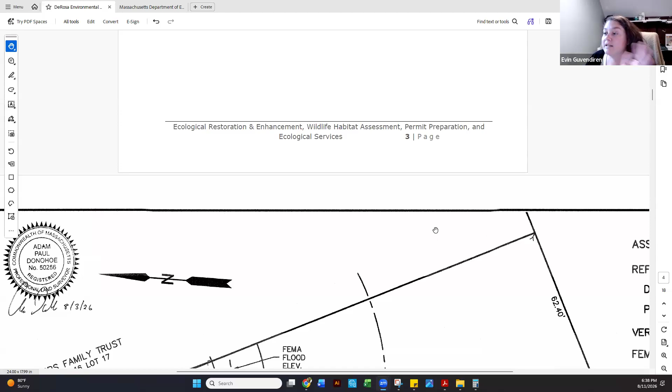And then we provided some annotated photos to help illustrate, because this is a unique area in which there is a certain section that has the deepest water. So in order to utilize that to maximize the amount of the float on the water and minimize the disturbance to the mud flat, that's the location we're trying to keep everything.

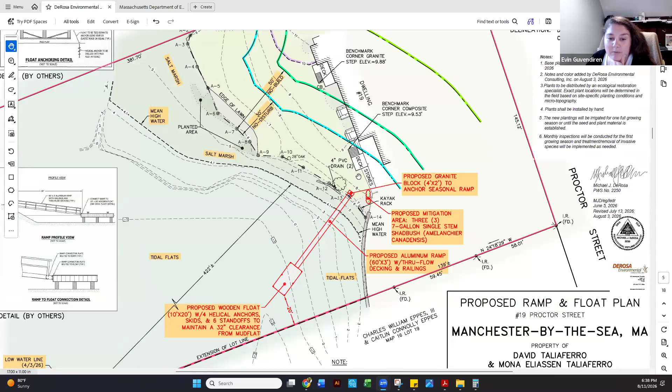So here's the revised plan. Here's the 20-foot setback that we've maintained. Here's the area, the 16 square feet, that will add the shadbush to.

Do you want me to go through the alternatives a little bit, or? What do other commissioners want to hear those? I don't need to. Okay, I read it. Okay, great. Good. Okay, that's if you want it, ask.

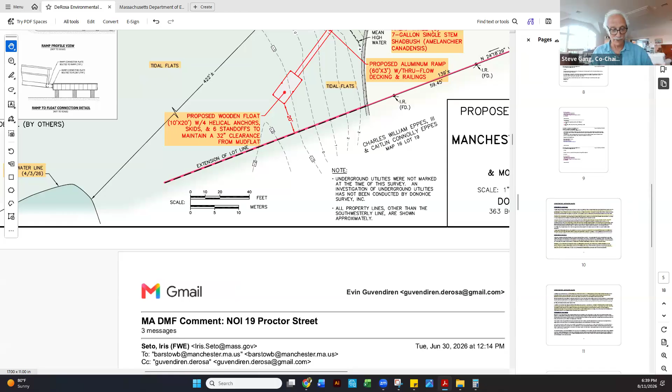Okay, I think we can. So let's get to questions or comments from the commission. Arnold, sorry.

Thank you for the updates. I read through the package, and of course the skids are maintained, and that's really my primary comment and concern, that we have added the skids, and the proposal is to keep the same 10 by 20, and the original 60-foot aluminum walk. It really comes down to load bearing capacity of the mud flat. So we want to minimize the area of disturbance while supporting that pull and distributing the weight on the mud flat.

So what I couldn't see in the package is basically how did we arrive that a 6 by 2 plank along the length is sufficient without going overboard. We want to minimize surface while ensuring we don't get disturbance to the surface, and avoid potential bit breakthrough or shear breakthrough to the mud that may lead to suction, or the flat getting stuck initially as the tide comes in, which may disrupt the surface. So that's the detail I couldn't see in the package, how did we arrive at those particular dimensions to minimize area while addressing the load bearing capacity of the substrate of the mud flats, essentially.

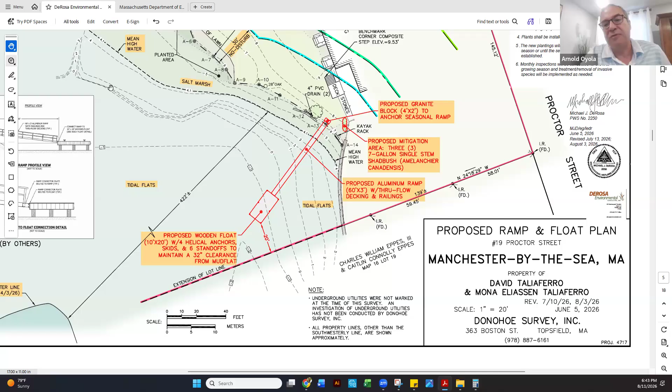So everything above that, I think I'm personally fine with the distance, the 32 inches and so on. It's really, how do we arrive at those particular skids?

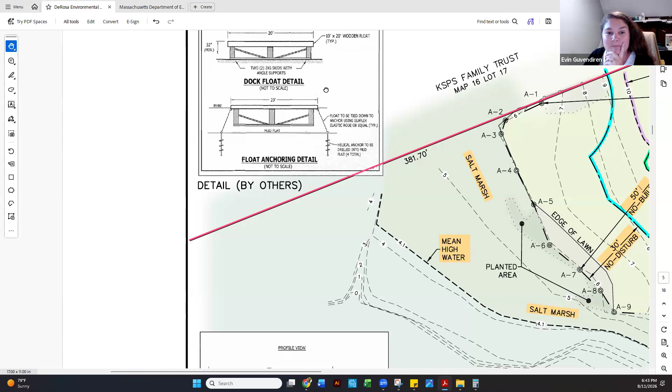Yeah, so I think that just comes down to the experience that Ramsey Marine has had with similar floats in their design. I'm not a dock designer myself, but I rely on and trust Ramsey to provide information or a design that would resolve the float sinking into the mud flat, because that's why we added the skids in the first place, right? Correct, yeah, with the standoffs. Yeah, my opinion, very, very likely it would have sunk in.

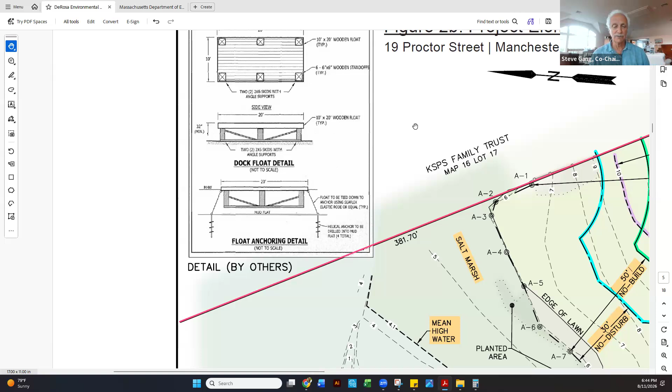The reason for the 60-foot long, unusually long ramp gangway is so that they can get out to what they perceive to be deeper water. There's some evidence from their photographs that the water is a bit deeper just beyond where the float will land, although the difference is measured, I think, in inches.

It's not dredged, and there's no drop off. But the 60-foot length then dictates the minimum size of the float, because the ramp is going to roll on the float, and a smaller float would be largely consumed with rollers for the ramp. And that determines the weight that they have to try to keep from sinking into the mud. So it all begins with a choice to try to get as close as possible to what the consultant has generously described as open water.

Any other questions or comments from commissioners? Jim, please. Yeah, well, I think it's not open water, and I think it's pretty clear that the raft will sit on the mud for some period of time. And I thought that when we were talking about the calculation for mitigation, we had added the 10 square feet of the skids and added that to the amount. So it would have been closer to 30 square feet, not 10.

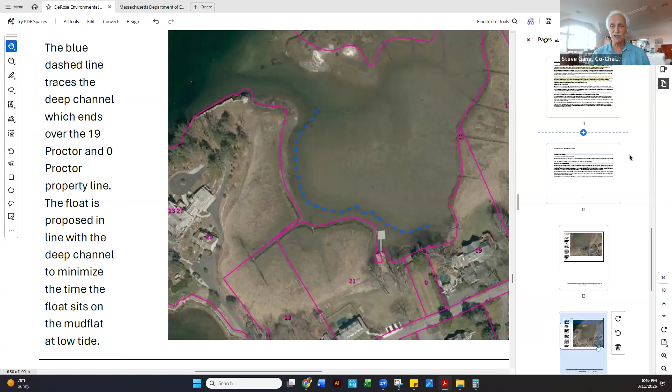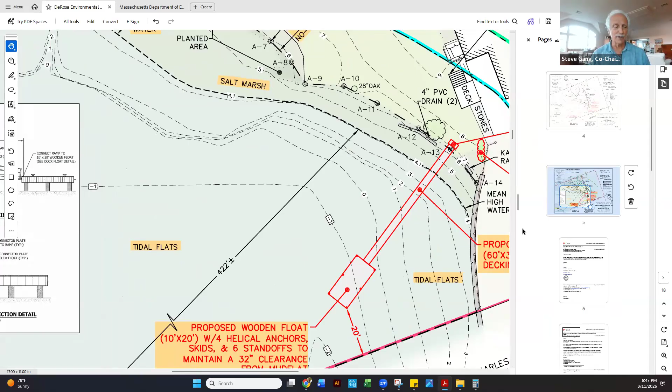Thank you. Martha. Yes, on this image, just at the far left, if you bring that white box over so it's a little more visible, you see that the ramp is connecting, it looks like, to a hinge on the side of the float. And I believe as it's described now, it will actually sit on top of the float a couple of feet in order to not tip the float down into the mud so directly as it would if they use the configuration that's shown here. Do I have that correct, Evin?

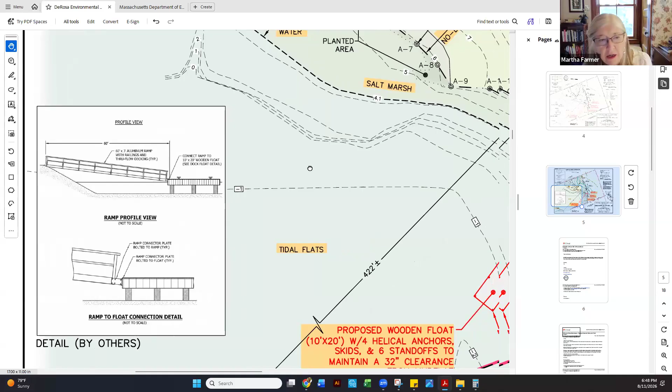It's supposed to actually sit on the top with rollers, not be hinged at the edge of the float. Okay, so the image has not been corrected, but the description has been. Correct. Thank you. And I also want to mention that Tommy Baker is really good at what he does. I'm sure he can get it on and off at lunar high tides, as he says.

So with his barge, but it is, I guess the point that Arnold was making is, how do we know this will not sink into the mud? The reality is that it depends on the mud. There are different kinds of mud, and things sink more in others. So I assume, and not just assume, I know, they have attempted to assess the type of mud that it's going to be going into. So if it doesn't work, what is the mitigation they have to do to fix it?

We would have to put that, I think, in a condition, a special condition, perpetual, attached to the order. And we have not done that before. But I take your point that no one can guarantee just from kind of historical practice that a particular float and particular skids are not going to sink into particular mud.

Flotation will help a lot to keep it from grounding out. Thank you, that's reassuring.

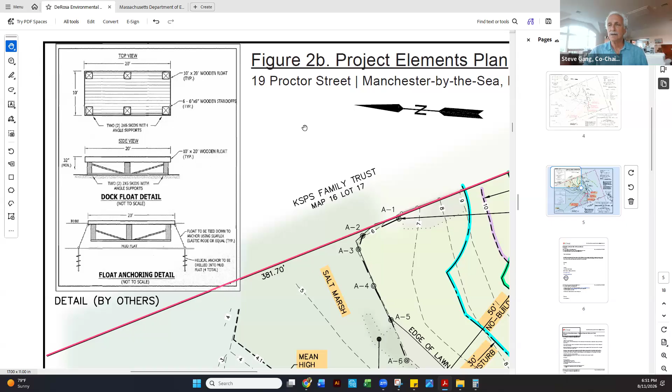Commission ready to vote on closing this hearing? Yes. Can I hear a motion? I'll make a motion that we close the hearing on Mass DEP 039-0950, 19 Proctor Street.

Second. Thank you. I believe everybody is eligible to vote on this one. So how do you vote?

Marty, yay. Jim, approve. Gordon, yes. Arnold, yes. And I'm missing David. Too obvious, that's a yes. Thank you, and the chair is a yes. So that's unanimous. Shall we move to special conditions for this project?

Yes, I have it up already. While Bethany's getting that, I want to note that I'm becoming more convinced that the proliferation of these kinds of floats and docks, which was unusual 10 years ago and is now much more prevalent as more of them pop up, requires us to think hard about how we're going to prevent impact and encourage proper usage of these. I'd like us to have some discussion of that in new and old business at the end of the meeting. Let's go to special conditions.

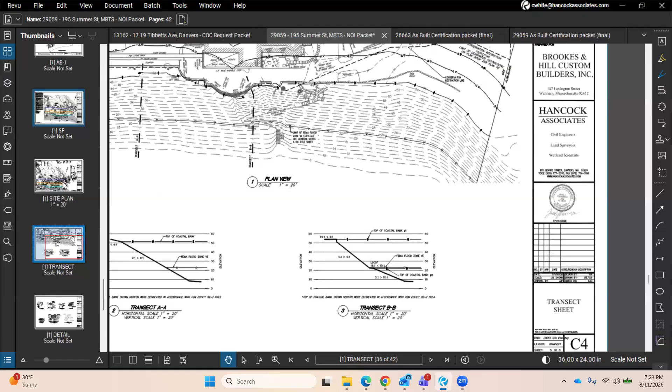Here we have Caitlin. Could you just point to the area where impervious will be removed? Yes. Thank you. Yeah, I had the same question. Thank you.

I'd have to confirm with the engineer, I think, because he's the one who did the calculations, but I can definitely provide that. I believe that part of that would have been removing the wooden wall. Other than that, I would have to confirm with him what he included in that calculation, but we can definitely get that information for you.

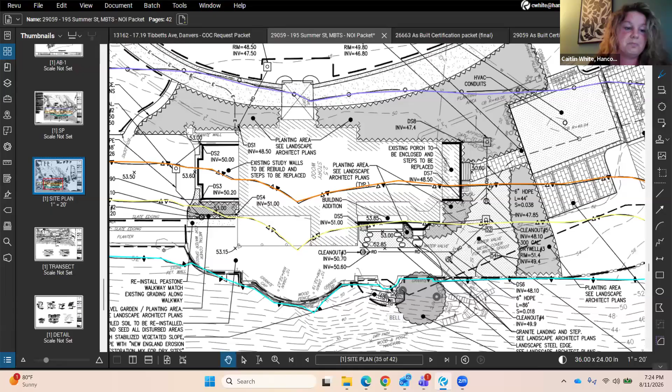Thank you. Other questions or comments from the commission? Was there going to be a discussion about the plantings, or were you going to hand it off to someone else to talk about the plantings?

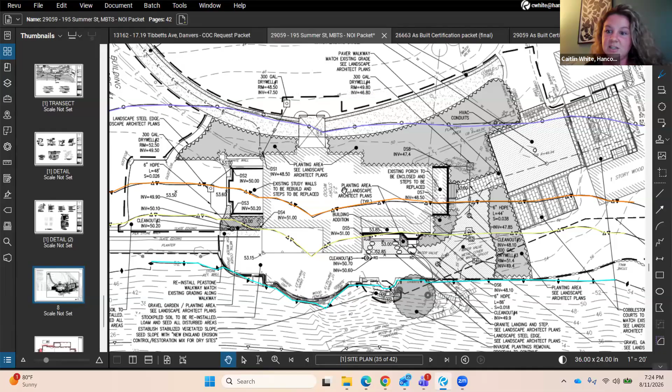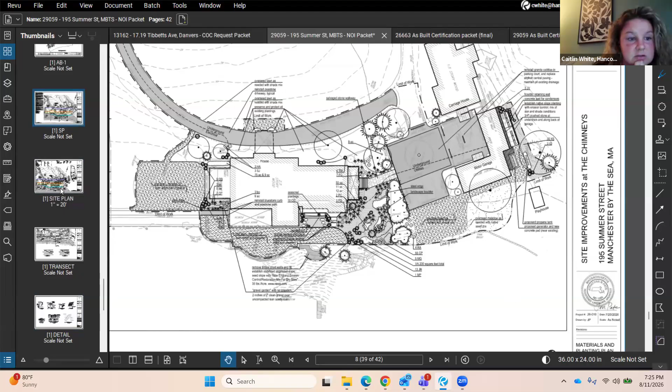This is John Pate, landscape architect for the project. To answer your previous question about where the impervious is being removed - Caitlin, could you zoom into that area? Right in front of the proposed addition, there previously was a bluestone patio between the spot grades 53.00 and 52.85. That rectangular space was all previously paved. We just pulled up the bluestone paving for the construction access.

So how will that be treated when it's finished? Good question. That area, and all the area that has a light hatch across it, is all to be a proposed gravel garden. It was a typical irrigated lawn outside of that paved terrace, and we're proposing a lot of native plants in that area with some casual gravel paths, but the whole entire area would be a gravel garden.

Great, thank you. Anything else we should know about replanting or new planting? The other proposed areas are replacing in kind, essentially. The turf area off to the west is the exact limits that it currently was - those are proposed to be reinstalled exactly as they were, with no additions into the bank area there. And then off to the east side, that reestablishes a meadow there. Thank you.

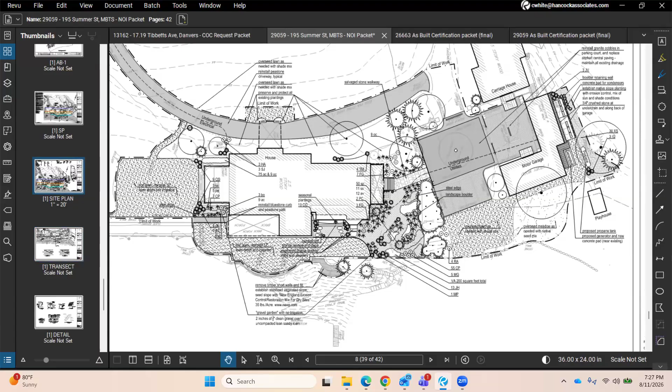And when are you hoping to accomplish this project? As soon as possible. That's not a surprising answer at all. Well, I for one could benefit from walking around this. It's a complicated enough set of small changes that in total it's a fairly large amount of work inside the buffer zone and a little bit of work on the resource itself.

Anyone else interested? Yes, I am. Yeah, I would also like to see it. I want to understand this old wooden wall and what's going to be involved to remove that, because it looks like it's on a pretty steep grade, and I don't know what it was for, but that looks like the one area that's particularly within the zone we need to be conscious of.

Those walls - there's two walls there. This is John Pate again. Those two walls were, I don't know, installed by a previous owner for landscape. There's not really anything growing very well in them. The wall is a two-tiered wall so that the grade could be leveled out for that planting. And the walls are failing.

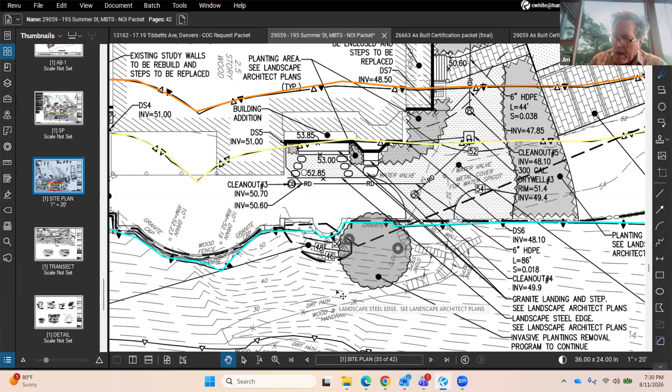Good. Jim? Thanks. Do you have an estimate of how much material you're gonna move on the landscaping side? I mean, some you say you're taking out and putting back. And second, I assume there's more work being done inside the house, so is there a staging ground somewhere outside that has to be addressed?

All staging is proposed within the chain link fence that Caitlin mentioned earlier. Okay, and I don't have a calculation - what specifically was your question regarding the volume of material? Just curious about how much material is being taken out. We're talking, you know, it just helps me get an order of magnitude of the work.

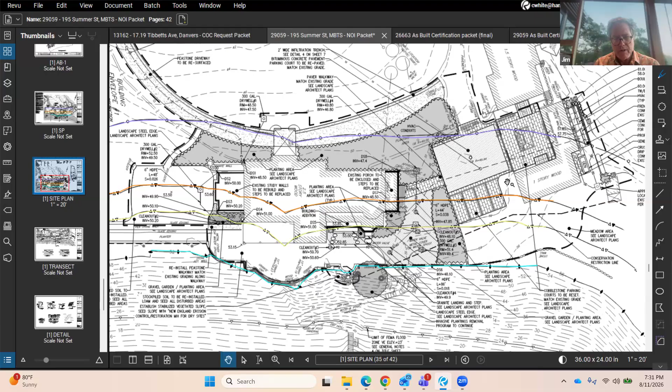I understand what you described - is this at the walls we were talking about, or in all the resource area landscaping? You also mentioned the bluestone - I don't know if that's being hauled out or just stored and reinstalled. Yes, part of the bluestone patio was removed. Some of it will be reused in various locations within the 100-foot setback, but just not in that location.

And then in terms of the soil volume at the timber walls - both of those walls are about 16 inches tall. I'm guessing, I haven't measured them, but I'm guessing they're around 15 feet long, something like that, curving around.

So just to be clear, you're saying that the cobbles, when they're removed, will be stored nearby until you can place them back? Yes, exactly. And obviously, when you demo the concrete pad, that'll be removed from the site.

In addition to the house, the landscape is also of that era. This area, some of the trees are even before 1902. So we do have construction fencing, 6-foot high, around the landscape to protect

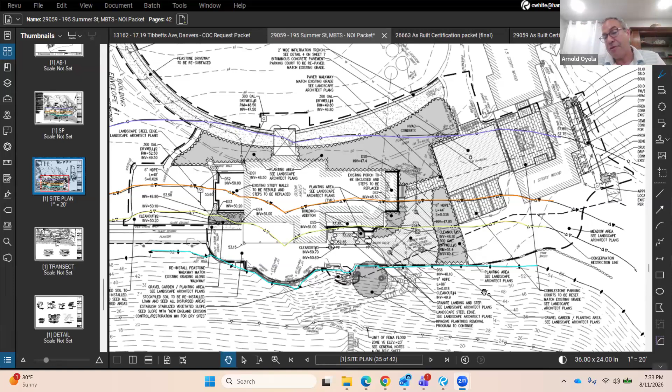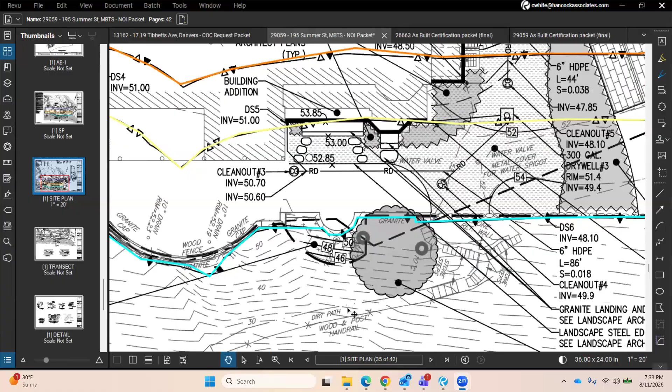Very good question. Where the retaining walls are in the resource area, those are intended just to go back to the natural slope of the bank there. All other grades within the proposed work are to match existing, no change to grades. Thank you, and no change to where the drainage is going. Drainage, of course, would go away from the bank.

Mr. Frank? Hi, good evening, I'm Thomas Frank, I'm the owner. I am not a construction professional. However, I can comment on staging, which is primarily taking place in the many garages that we have, and also on another property that I own.

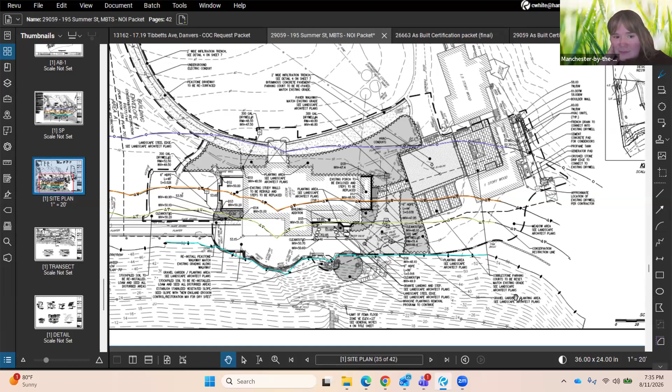Okay, thank you, that is helpful. If there are no other comments or questions from the commission, how about the public? Any questions or comments on 195 Summer Street? Use the raised hand icon if you would wish to speak. I am seeing none.

So if it's okay with you, we will schedule a site visit and continue this to the next meeting, which is September 8th. Very good, can someone make that motion for me? I'd like to make that motion. Good, second? I'll second it. Thank you, all in favor? David, aye. Jim, aye. Gordon, aye. Marty, aye. Arnold, aye, and I'll make that unanimous.

Thank you, thank you, good concise presentation of a complicated project with many moving parts. When would be a good time for a visit? We have developed a habit of doing this first thing on a weekend, like early-ish on a Saturday. Is that possible?

That should be fine as long as Mr. Frank approves. All right, I got a thumbs up from Mr. Frank. That's good. And commissioners, is this Saturday feasible? Very early, I have a 9 o'clock meeting on Saturday.

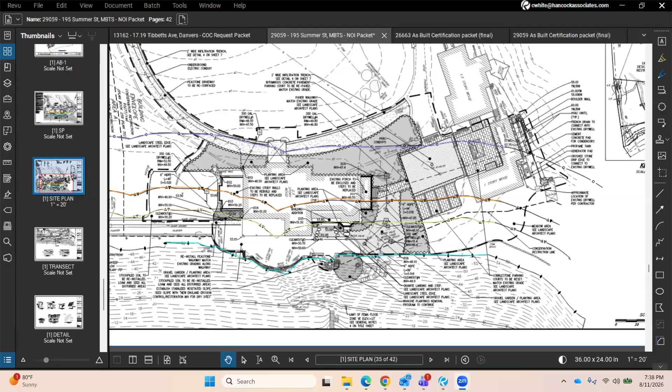Caitlin, thank you, Tom Frank. We now take up a request for certificate of compliance at the same address from DEP file 39-839, same owner, 195 Summer Street Realty Trust. This is a project recorded in 2021. In the order of conditions, it authorized construction of a pool and associated structures within the buffer zone to Coastal Bank per the Wetlands Protection Act and our wetlands bylaw. Bethany, have you been out there to see completion and stability and such?

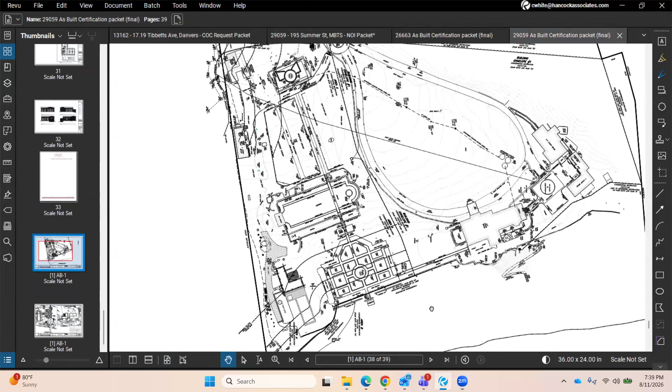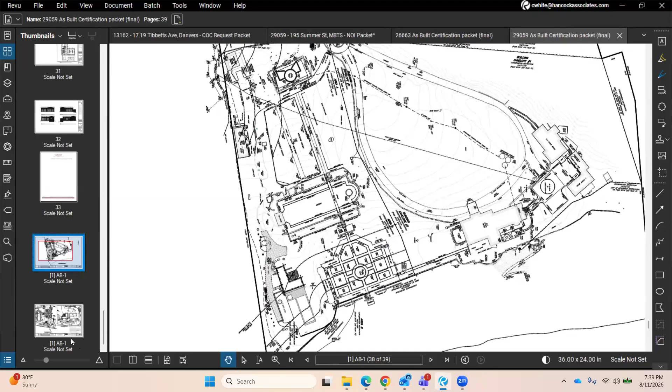Sorry, my internet was frozen. Have you been to the site to look at compliance with the order and stability of the site? Yes, I went last week with Caitlin, the head gardener, and the homeowner. Everything was to plan and stable. It was a very nice pool area.

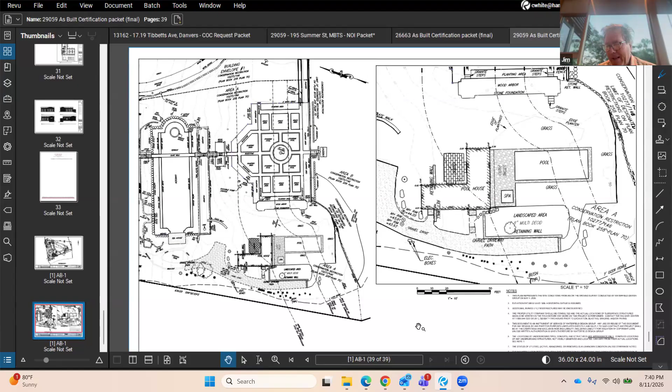Good. And do we have a letter from an engineer in the package? Yes. Perfect. All right, any questions or comments from the commission?

Or from the public? This is a compliance review for a previous order for 195 Summer Street. Mr. Frank noted it won a Bulfinch Award. That's not bad at all, first time out of the box. Congratulations. All right, shall I hear a motion to issue a complete certificate of compliance for 195 Summer?

I'll make a motion. So moved. Do you second, David? I'll be the second. Thank you, Marty.

All those in favor? Gordon, aye. Jim, aye. David, aye. Marty, aye. Arnold, aye, even though you weren't on the commission you're empowered to vote on this. And I am an aye as well. So it is unanimous.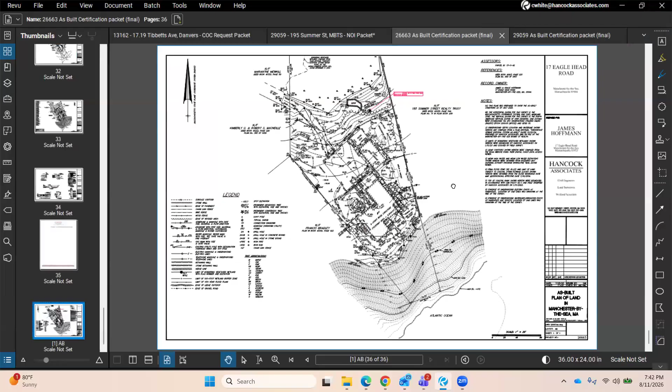And do we have an as-built signed off on? Yes, I can share that. Give me one second. Here is our as-built. No deviations to note. I reviewed the plantings in 2025 as well as 2026, and I feel like they are above the 85% survivorship threshold that you guys have. The plantings look lovely.

Excellent. More donuts. Any editorial comments from the homeowner? We can do the donuts after, at my place, so you can see it in the flesh. That's great, we can bushwhack from one to the other, can't we? As long as you're not worried about ticks. That is. Poison ivy, sharks, ticks.

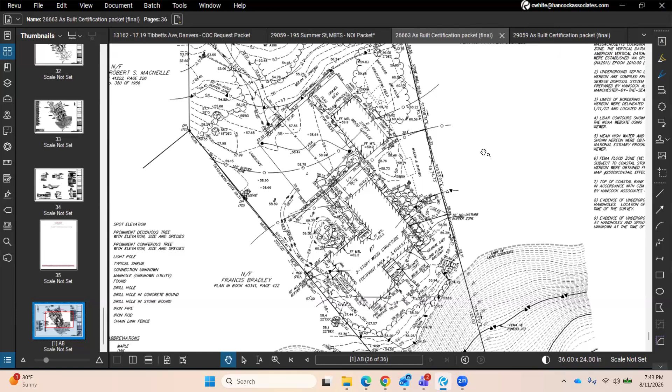I'll make a motion that we issue the certificate of compliance for Mass DEP 039-0891 for the Hoffmanns. Second.

All those in favor? David, aye. Gordon, aye. Marty, aye. Arnold, aye. And I am an aye as well. And I think we'll let you stand on the sidelines, Jim. Gotcha.

Thank you, Caitlin, thank you all, have a good night. We'll see you in spirit on Saturday. Yes, bye guys. Okay folks, that was a productive use of time, thank you for your attention.

We've disposed of the order of conditions for 19 Proctor, so we're into the odds and ends period, beginning with minutes from July 21. Any changes or corrections not already made on SharePoint?

Good, I saw a couple of people had been in there, so I know it's been inspected. I changed the spelling of Woodholm, corrected that, but that was it. Otherwise, very good, thank you whoever did it and corrected it. Hello to Kendall, go Kendall.